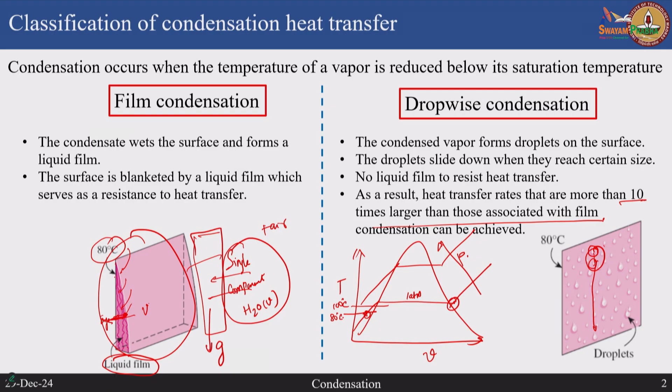But generally, if you compare, the rates of condensation with dropwise condensation are definitely much higher than film-wise condensation. Except this hydrophobic layer, surface roughness also plays a role.

Just like nucleation in boiling, nucleation in condensation is also a stochastic process. You do not see a uniformly rough surface produce nucleation exactly the same way every time. When you take experimental images, maybe 1000 images over a period of time, you will see that nucleation density and frequency are completely different. So that is also a completely stochastic process.

The theory of film condensation was first solved analytically by a person called Nusselt, after whom the Nusselt number in forced convection came into picture.

He considered a profile like this: you have a vapor outside and a condensate falling as a film, flowing like a boundary layer. The velocity profile looks like this - a no-slip boundary condition at the wall, then the velocity gradually increases, reaching a maximum somewhere close to the thickness of the film, not exactly at the edge, and then it decreases and reaches zero, because outside the film the vapor is not completely stationary - it is also flowing due to gravity.

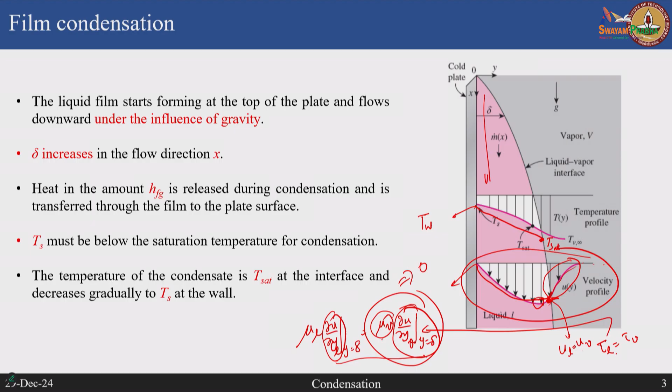So, basically a much simpler approximation to the more complex non-linear convective temperature profile he has assumed, and also the velocity profile he has simplified such that the maximum velocity happens right at the edge of the film.

So, this is how it looks - this is the Nusselt approximation, not the actual case, but this is the approximation, and the same thing with the temperature profile.

So, the idea here is making sure that the shear stress is basically negligible, because the viscosity of the vapor is much smaller than the liquid, so practically you do not have to consider the shear stress, and momentum changes in the film are negligible.

Therefore, within the film any momentum change across the film, for example along the length of the plate, will be very small and can be ignored. Apart from that, the condensate flow in the film is laminar - if it were turbulent, this theory would not be very accurate. He also approximated the temperature profile to be linear instead of non-linear.

So, I am just skipping the derivation, but you can go through it in the lecture when I post it. He assumed a very small control volume like this, where the condensate entering at x is m dot x, and what is leaving is m dot x plus dm dot x.

And the condensate is condensing exactly at the interface of this liquid vapor film. So, this interface is at T sat, and the condensate is exactly condensing here. So, this is dm dot due to the condensation.

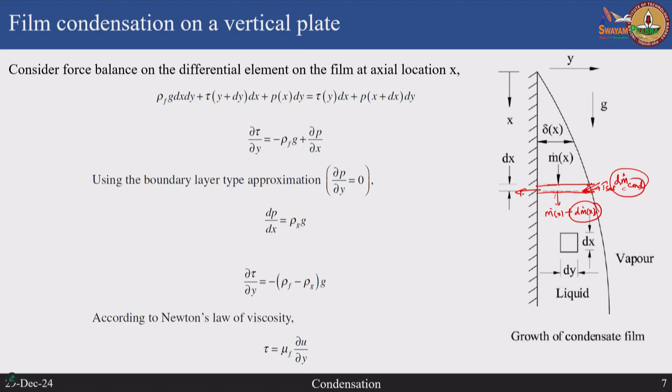So, this basically adds on to the m dot x to increase the mass flow due to the condensation, and this condensation heat has to be removed from the wall. So, there is also a heat transfer - the condensation heat transfer has to be effectively carried out from the wall. So, you have to consider mass balance, momentum balance and energy balance for this derivation.

And finally, if you do that, you get the expression for the condensation heat transfer coefficient, which turns out to be inversely proportional to the condensate film thickness.

And from the Nusselt theory, whatever I have briefly explained, he got the expression for delta, the film thickness, which varies along x, of course, because it is growing. So, he obtained this expression and therefore the expression for the condensation heat transfer coefficient.

So, from this you can calculate the average condensation heat transfer coefficient by integrating this local heat transfer coefficient along the entire plate length, and he gets this H.

So, therefore, this is the same expression that was later adapted for film boiling. The only thing was they added a coefficient, so the coefficient was tweaked for film boiling, but essentially the expression comes from the Nusselt condensation theory.

Now there is one small change you have to do sometimes, because of HFG, the latent heat of vaporization or condensation. The assumption in Nusselt theory was that the temperature of the liquid film at the interface was exactly at saturation temperature, but you can have a vapor which is possibly even superheated, which is then condensing. So how do you account for that?

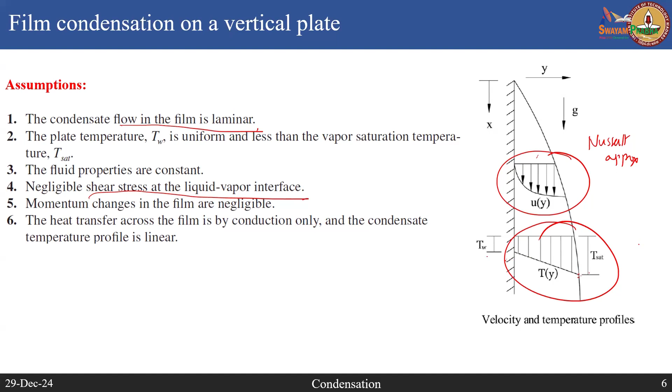The other thing is that from the wall to the interface there could also be subcooling. He did not consider the subcooling and superheated vapor effect. So later people added that, and they call this the modified latent heat of vaporization.

So HFG star: if you consider that the final state is a subcooled liquid instead of saturated liquid, you add a difference of sensible heat due to subcooling from Tsat to the surface temperature. Similarly, if the vapor enters the condenser as superheated vapor at temperature Tv instead of saturated vapor, you have to consider some degree of reduction from the superheated state to the saturated state, accounted for as a sensible reduction in temperature.

So the final HFG star includes both the effect of subcooling the liquid as well as reducing the vapor temperature from a superheated state to the saturated state. These effects were later incorporated additionally into the correlation, which remains the same, only HFG is corrected to account for the modified latent heat of vaporization.

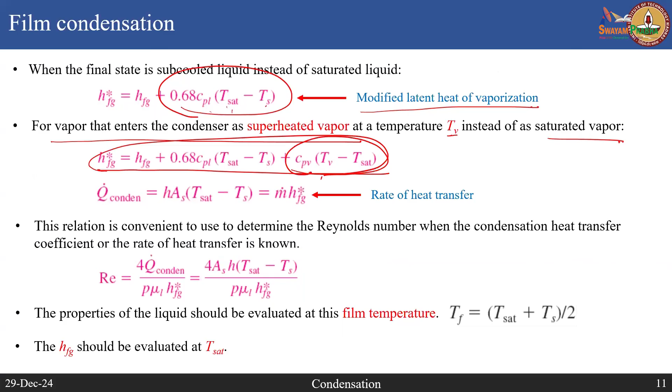The other important thing is that in film condensation, the condensate flows down, and there are different regimes of condensation in film-wise condensation itself. For example, you use what is called the Reynolds number here.

The Reynolds number is calculated based on the hydraulic diameter. If it is a plate, you use only the length; if it is a cylinder or something, you use the equivalent hydraulic diameter, and then you have the mass flux, which is rho times the velocity of the liquid film divided by the viscosity.

The hydraulic diameter is 4 times cross-sectional area by perimeter, and you can write it in terms of the mass flow rate. So if you know the mass flow rate, you can use it to calculate the local Reynolds number and classify the regimes of film-wise condensation.

For example, if you have Reynolds number less than 30, this is called laminar wave-free condensation. This is your classical film condensation, for which Nusselt developed this film condensation theory.

But if you increase the Reynolds number after 30, up to about 1800, you find small wavy patterns established because of some instabilities, and this becomes a wavy but still laminar regime.

Now if you go to very large Reynolds numbers above 1800, you see turbulence in the liquid film, with lots of turbulent effects, and it becomes a completely turbulent film. So generally, the Nusselt theory is valid only for the wave-free laminar condensation regime.

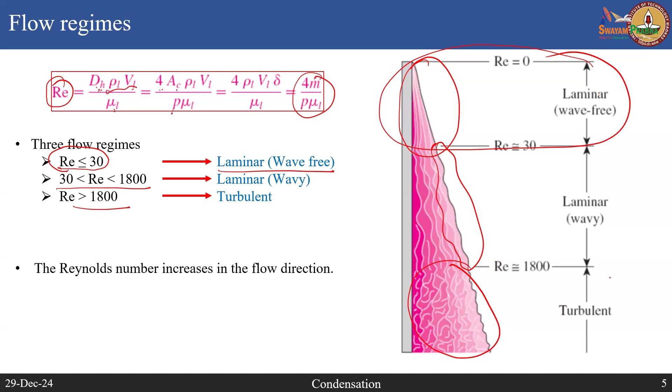But people later developed some empirical correlations for when they move to even turbulent film condensation. However, very rarely do you want to go to the kind of lengths where turbulent condensation comes into play.

What happens if you change the geometry of these condenser tubes, instead of just a flat plate, for which the condensation theory was developed by Nusselt? What happens when you change this geometry to horizontal cylindrical tubes or a sphere?

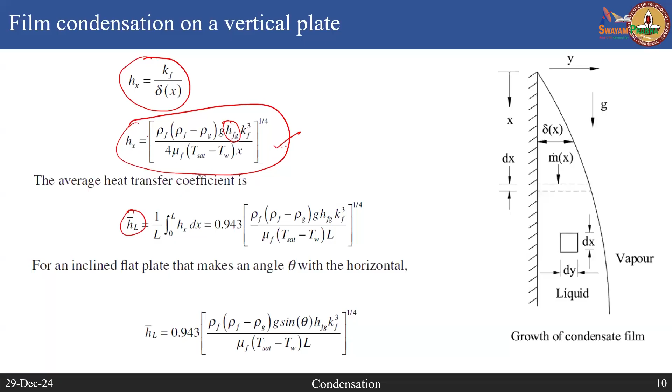What they used was the same correlation, except instead of using 0.943 for the average Nusselt heat transfer coefficient, they use 0.729. So if it is a cylindrical tube, they just change the coefficient accordingly. Apart from that, the other parameters were exactly identical to what was developed by Nusselt for a flat plate.

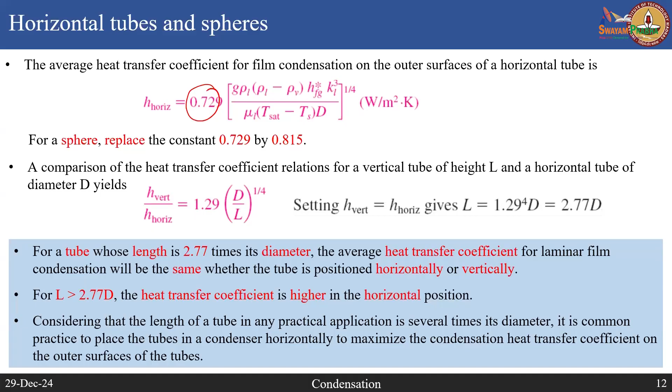So essentially there is no hard analytical expression when you change the geometry. It is primarily developed for a laminar wavy-free regime for a vertical flat plate by Nusselt, and later it was slightly tweaked or adapted to other configurations depending on whether it is a cylinder or a sphere. I'm going to skip some of this because we don't have too much time.

But of course, when you have tube bundles, with horizontal tubes one below the other, there is condensate. You have vapor flowing, and inside the tube you have cold water.

The vapor has to condense, and this condensate will be falling like a film around the cylinder. It's not just that, it also accumulates and falls on the tube below. As you go down, the thickness of this film progressively increases because it's accumulating from the previous tubes.

Therefore, if you look at the heat transfer coefficient for this entire tube bundle, it will definitely be lower than the heat transfer coefficient of a single tube. The reason is that the thickness of this condensate is progressively increasing along the downward direction.

So to account for this correction, people use a factor of n instead of just the diameter of a single tube—they use n times d. As you increase the number of tubes, the heat transfer coefficient of this combined n-tube bundle will be corrected, reduced accordingly compared to the heat transfer coefficient of a single tube. This is the standard expression used in industry to design tube bundles for condensers.

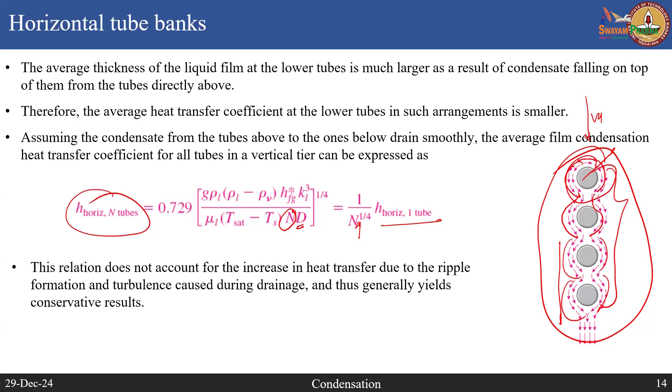Is this for both film and dropwise, or only one? This is only film. Whatever I've talked about so far is theory assuming film condensation. For dropwise condensation there is no theory.

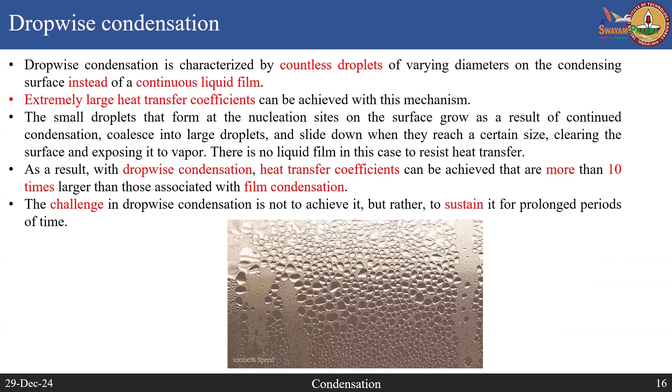For dropwise condensation, it's a highly stochastic process because there is nucleation of drops, and these drops can coalesce and form larger drops. Depending on the orientation of the surface, these drops can actually be eliminated by gravity.

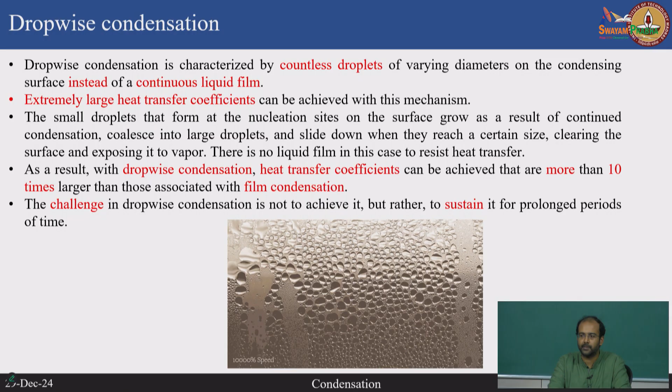But in terms of heat transfer rates, these are more efficient—you have heat transfer coefficients which are 10 times larger than film condensation. But as I said, there are no theoretical models or expressions for dropwise condensation. Most of it is empirical, and any textbook should give you a standard empirical correlation for this.

So finally, to conclude condensation, whatever we've talked about with Nusselt theory and so on assumes a pure single component vapor environment. If you have vapor plus a non-condensable gas, typically air, how is it going to condense?

In that case there will be a resistance to the movement of these vapor molecules to the surface, and generally the condensation performance in the presence of any non-condensable gas will be poorer, much lower than with a pure single component vapor condensation. This is generally the thumb rule.

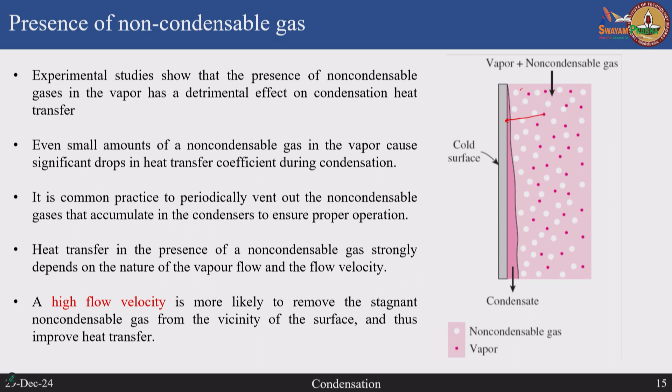So if you are designing your condenser heat exchanger for only pure vapor, you can expect that when you have a non-condensable gas like air mixed with the vapor, you will see generally much lower values of heat transfer coefficient, because this causes a resistance to the movement of these vapor molecules. So with that, we have quickly summarized condensation.

And now I want to go into flow boiling.

Before that we'll also look into a couple of tutorial problems. So what is the time? Okay, so we can start flow boiling and then give a break.

Now I think you have understood the mechanisms of boiling, in the sense of how nucleate boiling happens. Now we will extend it to a case where there is movement of fluid in tubes. This is the situation we are now going to look at, which is called two-phase flow boiling.

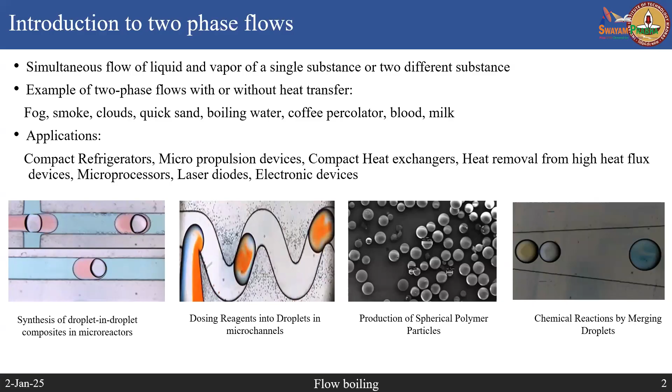Professor Marco has already discussed some of the different aspects of multiphase or two-phase flows that you come across when there is convection. For example, people talk about micro reactors where there is one droplet of one component suspended in another, and these droplets are used to transport smaller droplets inside capillary tubes, which can be used in reactions like in micro reactors.

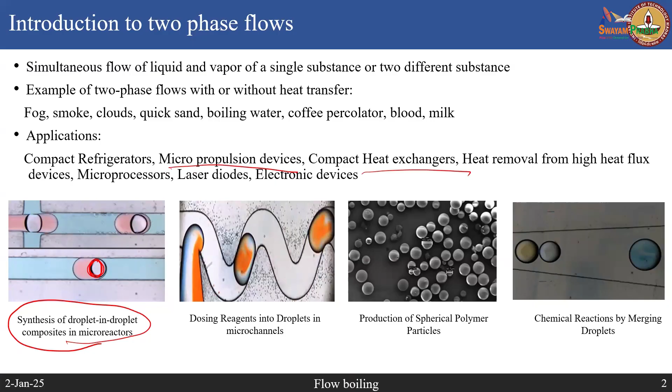Similarly, there are many other processes, for example in microfluidic devices, micro propulsion devices, and compact heat exchangers, where you can come across movement of two-phase flows. So it's not just a phase change happening on a stationary surface, but there is also movement of all these flows that are happening.

So the question is, why do we need to go to smaller sized channels when we talk about flow boiling? Of course you can do flow boiling in conventionally large sizes, on the order of a few centimeters or a few tens of millimeters, or maybe 1 millimeter. But there is also an increasing demand to study flow boiling in very small sized tubes and channels. So what is the need for that?

As you know, if I look at the Nusselt number in a fully developed laminar flow, it's a constant value. For constant heat flux this value is 4.36, and in the constant wall temperature case this is 3.66.

So that means H into d by k is basically a constant, which means H is inversely proportional to the diameter. If I plot H on the y axis and the diameter on the x axis, as I reduce my diameter, my H is going to go up linearly. So this is the advantage of using smaller size tubes.

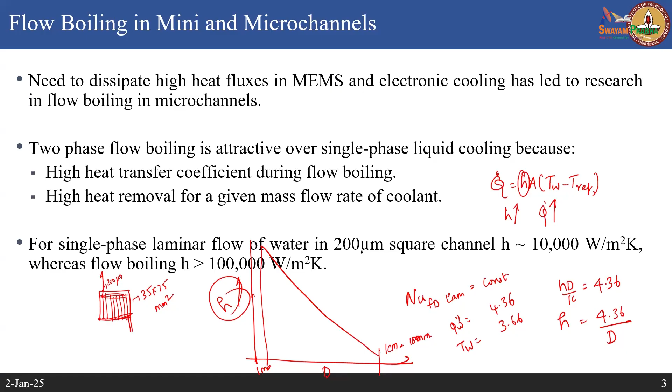So if I have many micro channels, each smaller in size and more in number, I am going to enhance my heat transfer coefficient significantly, and thereby get very high heat transfer rates. Now on top of that, if I do flow boiling inside these micro channels, I also increase the heat transfer coefficient by another order or two orders of magnitude. So that is the idea why flow boiling in small size channels is quite important.

The other thing is, from the fundamental physics point of view, when you do two phase flows, today Professor Markov was talking about the flow regimes. These flow regimes he was showing in different tubes.

Now these flow regimes can be obtained in two ways. One, you have a T junction, where I pass liquid in one inlet, and vapor or gas or air in another, and at the T junction these two mix and then flow together. Now I have the liberty of controlling what is the relative mass flow rate of air with respect to the mass flow rate of liquid.

Accordingly, I can produce different types of two phase flow patterns in these tubes. That is basically an isothermal two phase flow pattern you observe when there is no heat transfer, but you just change the relative mass fraction of the air and the liquid that you mix in a T junction, and then observe how the different flow patterns look.

That is one type. The other type is I take a tube like this, pass only liquid, and heat the tube such that my heat fluxes are large enough that locally my surface temperature is above the saturation temperature. Therefore I can produce vapor bubbles, not air bubbles, and I can also produce different flow patterns. So there are two different types of flow patterns.

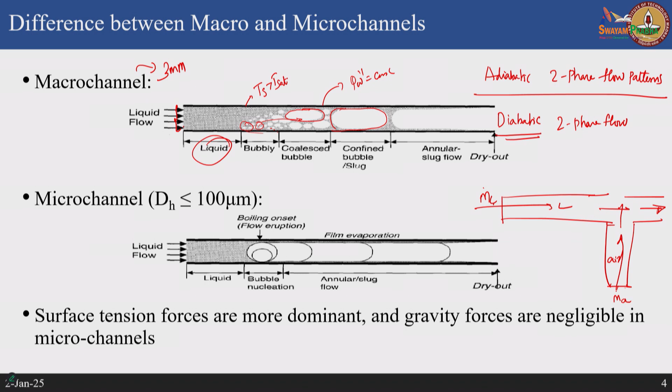As the surface temperature progressively increases above saturation, the bubble sizes become larger because you are adding more heat to the bubble. More fluid gets converted into vapor, and these pockets of vapor enlarge in size. As you go downstream, it reaches a point where the bubble cannot grow anymore because it occupies the entire diameter of the tube. This is initially called bubbly flow, and then you reach a point called slug flow, where the vapor has grown almost to the size of the diameter of the tube, with only a very thin liquid film separating the wall from the vapor bubble.

The core of the bubble is basically vapor, and this is called slug flow. If you continue supplying heat, even the thin liquid film will evaporate, and it becomes what is called annular slug flow, where the entire liquid film is pushed to a very thin annular region and the center core is completely a vapor pocket. Further supply of heat results in complete evaporation of the film, leading to what is called dry out.

Now if you plot the quality of vapor, that is the vapor mass fraction, I am going to plot this vapor mass fraction x, which is the mass flow rate of the vapor divided by the total mass flow rate of the flow. Right at the inlet this is going to be 0 because it is pure liquid.

So at dry out, vapor fraction will be 1. It starts from pure liquid, and then progressively it increases, and at the point of dry out it reaches the value of 1.

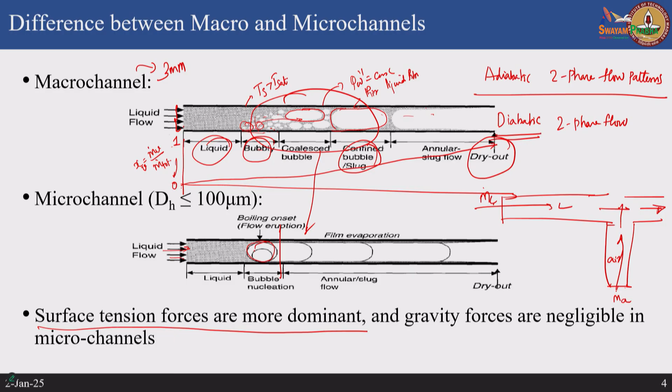So this is a very complex interaction when you look at flow boiling. There are a few non-dimensional numbers we will quickly go over, and then take a break.

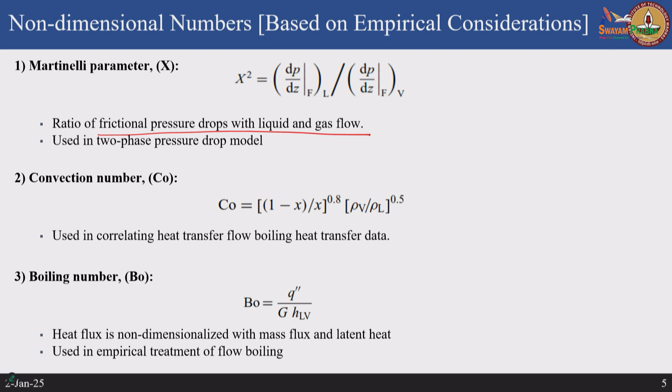One is called the Martinelli parameter, which is basically the ratio of frictional pressure drop when you have only pure liquid inside the tube to the case when you have only pure vapor. Imagine the tube now has a mixture of two phases, liquid and vapor. If you have only pure liquid, what is the pressure drop, versus what is the pressure drop if you have pure vapor - take the ratio. This is defined as the Martinelli parameter.

The reason we use this is that it's the most common parameter by which two phase flow pressure drop is calculated. When you have two phases in a tube, the two phase pressure drop is calculated as a function of this Martinelli parameter. Apart from that, we have another important number called the convection number.

Here we use another small x, which is the vapor quality, not to be confused with the Martinelli parameter. Vapor quality is the mass flow rate of vapor at a given cross section divided by the total flow rate. So this x squared is different from that.

Then we also use other non-dimensional numbers when we build correlations for two phase flows, called boiling numbers, for example. The boiling number is given by the ratio of the heat flux divided by the product of mass flux G and the latent heat of vaporization. So for a given amount of heat supplied to the tube, how much of this goes into the phase change process is given by this boiling number.

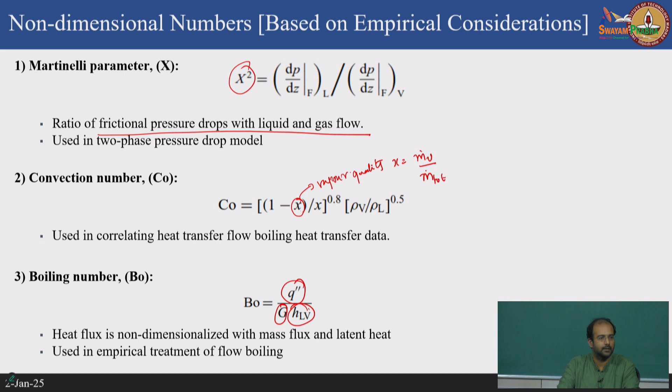These are a couple of numbers which are not very significant, but sometimes may be useful to understand the regimes. But the more important numbers are the bond numbers. The bond number is basically the ratio of the buoyancy force to surface tension force, which is important in two phase flows, especially when studying two phase flows in small channels. Somebody wants to know whether buoyancy is important here or surface tension is important, so you do that by calculating the bond number.

Typically if the bond number is less than say 2 or 3, it is dominated by surface tension as opposed to buoyancy force. So in all the smaller size channels like microchannels which have a diameter of 200 microns, the bond numbers are sufficiently small that you can ignore the gravity effects, and then only surface tension is going to drive the phenomena that is happening.

So it is mostly capillary driven phenomena. People sometimes use another number which is very similar to the bond number. They call this the Eötvös number. I think in some papers you will see Eötvös number, but essentially it is the same as bond number, so there is hardly any difference.

And then the other important non-dimensional number is called the capillary number, which is the ratio of viscous force to the surface tension force. So generally when we talk about two phase flows, you have inertia force, you have viscous forces, you have surface tension forces, and you have gravity forces. Now these are the four important forces, and all your non-dimensional numbers are a combination of two of these forces.

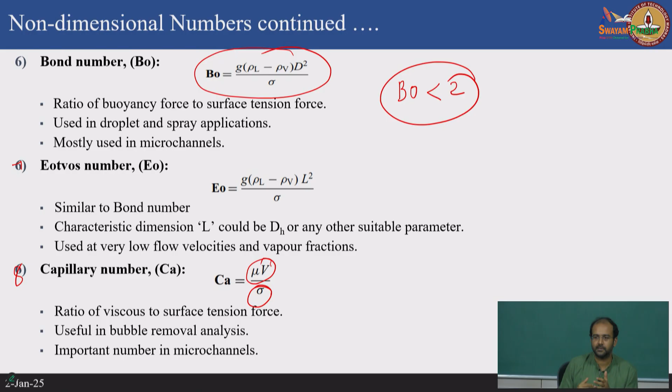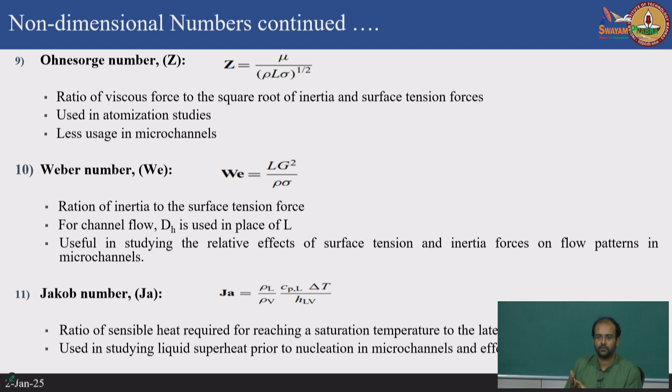So when we talk about bond number, it is buoyancy by surface tension. When we talk about capillary number, it is viscous by surface tension. Reynolds number is of course inertia by viscous force, and then we talk about Weber number, which is basically inertia by surface tension. So therefore, with these four forces you can define 3 or 4 non-dimensional numbers to include the ratio of these two forces.

So Weber number again is an important number where we use inertia by surface tension. Sometimes when you talk about drop impact in sprays, we characterize the strength of this impact velocity using the Weber number. Sometimes we also use this to characterize what is the inertia to surface tension force in flow boiling as well, but mostly Reynolds number itself is sufficient for that.

So bond number is also important, capillary number is also important, and then people use other numbers like Ohnesorge number. The Ohnesorge number is again a combination of the ratio of viscous force to, in the denominator, both the inertia and surface tension forces. Sometimes they are used in atomization studies. We do not use Ohnesorge number in flow boiling in tubes and all that; primarily in sprays you come across Ohnesorge number. There are different spray regime characterization maps based on Ohnesorge number.

In fact, Ohnesorge is a German name. Ohne means without, Sorge means worry in German. So it is the name of a person. Ohnesorge means without worry. So it is a surname, but people have used it like that.

Okay, and then again when it comes to heating and flow boiling, we use what is called the Jakob number. This is very important. For example, when you do flow boiling, just like in pool boiling you can have subcooled pool boiling versus saturated pool boiling, similarly you can have subcooled flow boiling versus saturated flow boiling. So in order to distinguish these regimes of flow boiling, whether you subcool it or saturate it before you send the fluid, you use the Jakob number, because the Jakob number is the ratio of the sensible enthalpy that is added to the liquid divided by the latent heat of vaporization.

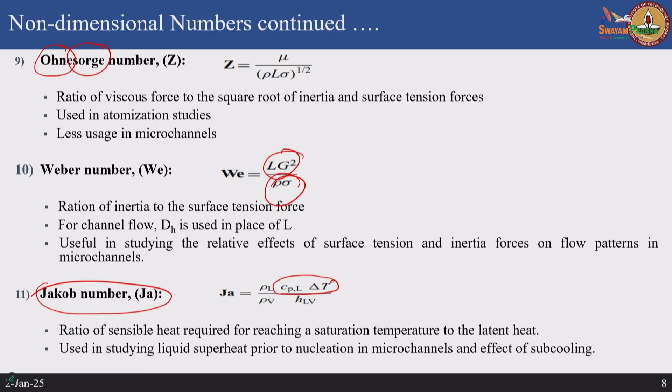And obviously, what will the Jakob number be if you have a saturated liquid? If you have saturated liquid flow boiling, then what will be the Jakob number? It will be 0, because your delta T is 0, since you are already reaching the saturation temperature. So anything apart from 0 means it is basically a subcooled liquid.

Okay, so we will stop here, we will take a brief break. Again we will come back to the different flow regimes in a little bit more detail, and then we will look at correlations for calculating pressure drop and heat transfer coefficient during flow boiling in small size tubes.